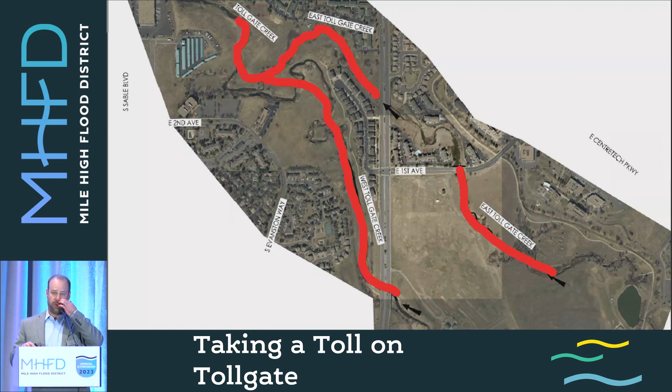So a little bit on the project background. This project actually encompassed portions of East Tollgate Creek and West Tollgate Creek, as well as the confluence downstream. This is in Aurora. 6th Avenue would be at the top of the page here, with Chambers being the north-south road in this picture. So this was actually an offshoot of a project that I'd supported while I was still with Stantec, and before I go too far, there were a lot of people who were way more involved in this project than I was in the very beginning. It was really a team effort between the City of Aurora, Stantec, Olson, CEI, and even later Icon.

But the project started out as a citywide assessment of Aurora's channels to determine which of the reaches were the most unstable and which ones wanted to be the priority for them to fix. So there was also a large floodplain split between East Tollgate Creek and West Tollgate Creek that the city wanted to mitigate, along with a few other priorities. In terms of project assumptions, we really wanted to make sure that we adhered to those guiding principles that we put down in our assumptions.

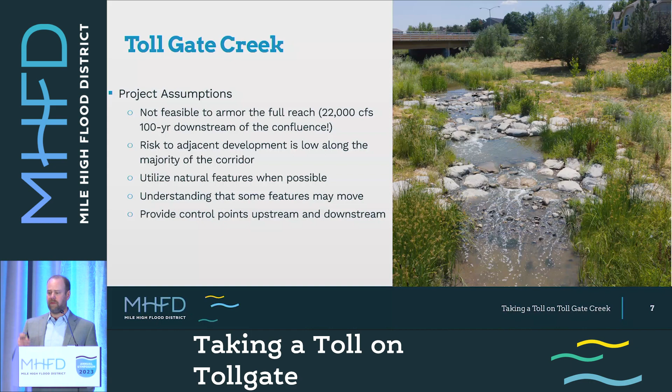So once we were finished with that assessment, we went into design and construction. And as I said, we really wanted to make sure the project goal was in mind. This is a figure that shows that floodplain split and really the impact that it has on the community here. You can see that the Peninsula townhomes were almost completely within the floodplain.

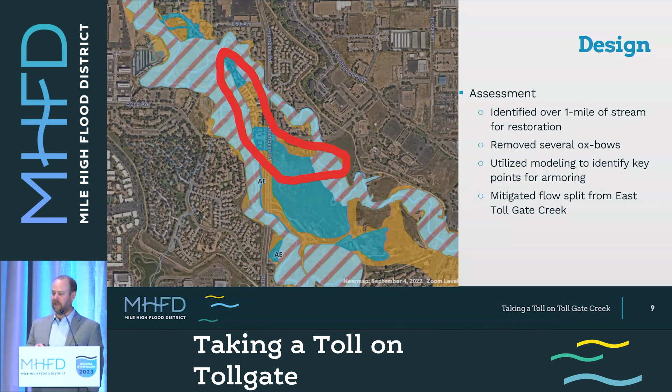And so we also wanted to stabilize the channel and provide a better overall system. We used a number of different techniques to stabilize the channel, including a few more creative techniques like stepped logs. We also used a combination of larger boulder drop structures and smaller riffles in numerous locations. We utilized an existing drop structure, which I'll discuss a little bit more later, but left some of the oxbows hydraulically connected to provide additional habitat opportunities within the watershed.

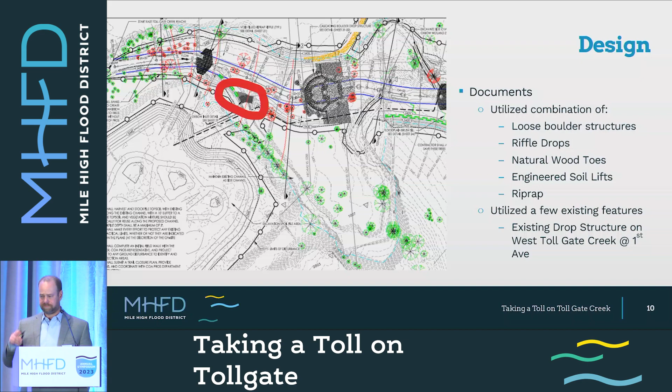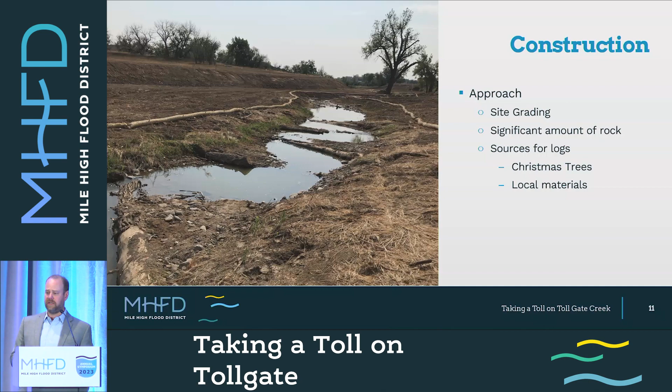Construction was still a pretty significant undertaking, even though we wanted to use a lot of the on-site materials. There was a lot of material that needed to be brought in, a lot of rock, and it was a whole team effort that really required everybody to be involved during construction. But it was so good that the contractor CEI won the 2021 Colorado Contractors Association H2O Award, which was really a well-deserved honor for the entire team.

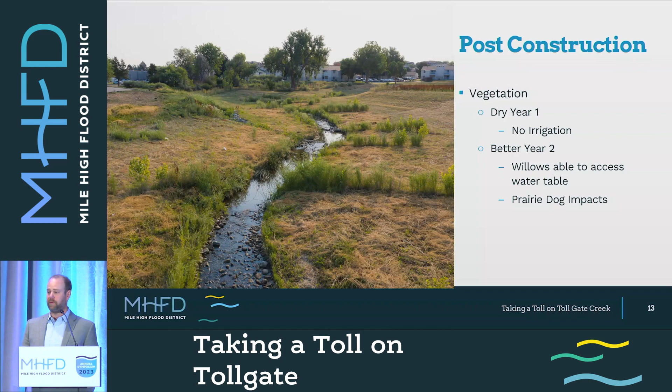But as we all know, the project doesn't stop once construction is complete. So we needed to establish vegetation, and that process can take many, many years. The first year was pretty dry, but we started to have a little bit of a better second year and did have some good establishment in certain areas. Prairie dogs are always an issue, but we did have these features like these willow stakes that were really performing pretty well. However, in some places you can start to see some exposed blanket that was going to become potentially an issue.

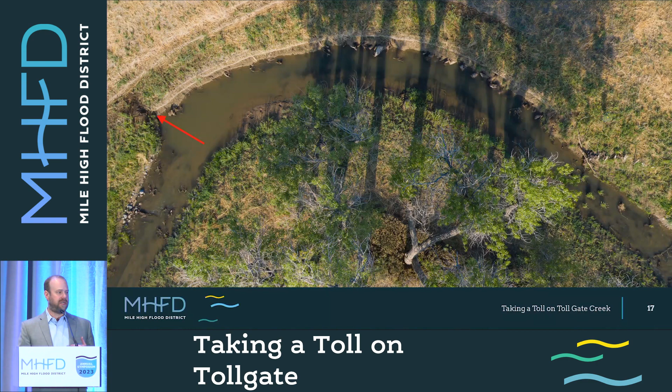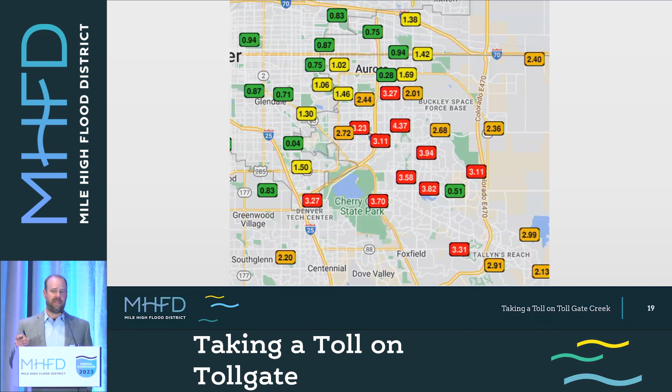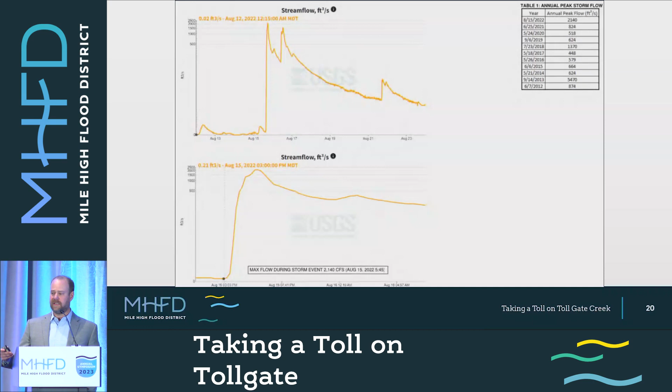And then we had August of 2022, last year, where we had a cycle of a couple of pretty high intensity storms within the watershed. We actually had over 4 inches of rainfall within the Tollgate Creek watershed. And the gauge here at 6th Avenue actually showed over 2,000 CFS coming through. There's a quote that says, sometimes there are decades when nothing happens, and then weeks when decades happen. And we got the flow from an entire decade within that week.

These pictures are actually of West Tollgate Creek within Horseshoe Park, which is in the upper part of the watershed. And this is after the peak had already passed, but you can see the amount of water that was coming through this system. So we knew that there were some areas that we were going to want to monitor, and we'd heard about some debris within the stream, and so we went out and did an initial assessment. From that assessment, we noticed that there were a few issues that we wanted to dig into further.

So we had Kate go back out there. Here she's measuring some rack lines, and we identified 6 locations that we wanted to take a closer look at. We determined 4 of the areas where we could continue to monitor because they were in low-risk areas and areas that we thought could heal more naturally. But we really wanted to dig into the other 2.

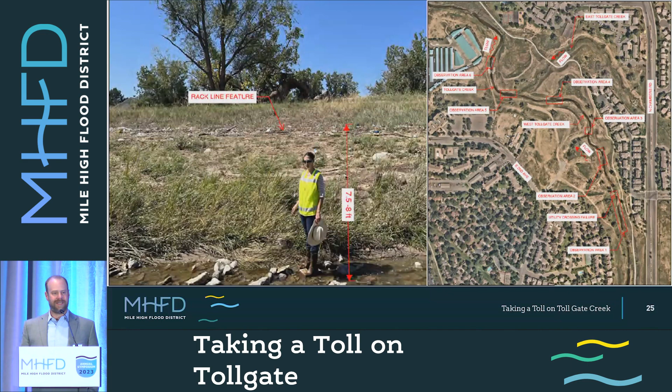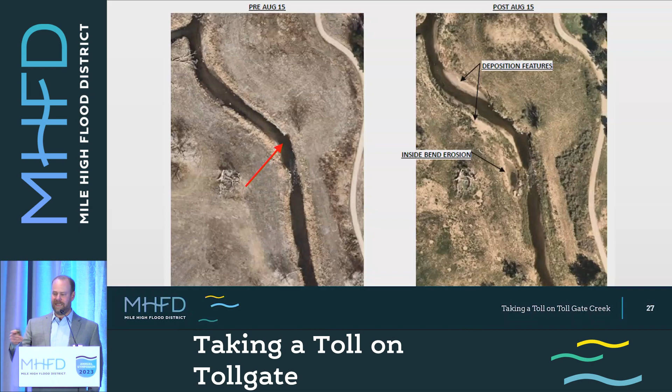The first area, which was Area 2, was just west of Chambers Road on West Tollgate Creek. I mentioned earlier that we utilized an existing drop structure as part of this project, and unfortunately that feature failed during the storm event. And this stretch happens to be just downstream of that failure. You can see in this picture on the left, before the storm, there started to be a similar notch being formed in that area. And then after the storm, the notch had expanded and some other material had been displaced. And after looking at this picture, you can see that that material really started to get displaced and started to cause problems around it.

And I think this was actually an area where we tried to protect a tree, and that tree doesn't look real good either, but I'm sure it'll provide some nice habitat at some point in time. So zooming out a little bit more, you can see that the stream really tried to stay in more of a straight line through this segment.

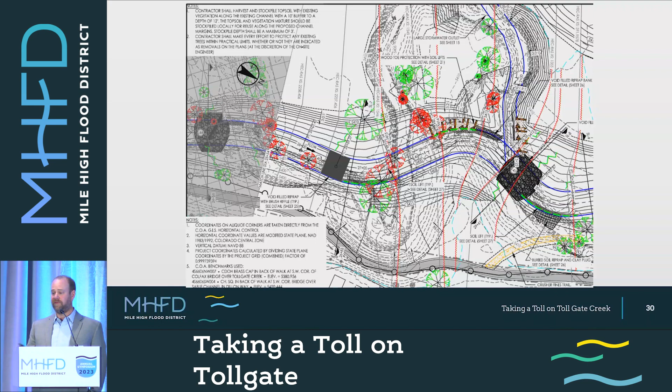You can actually see the failed drop structure here at the top of the screen, and you can see it might have actually had an impact on it. Looking back at the plans in this segment, though, we realized that we used a slightly different riffle through this segment. This feature didn't extend up into the embankment as far as the upstream and downstream features had been constructed. Because of this, it seems like the creek was able to flank the system and erode that material.

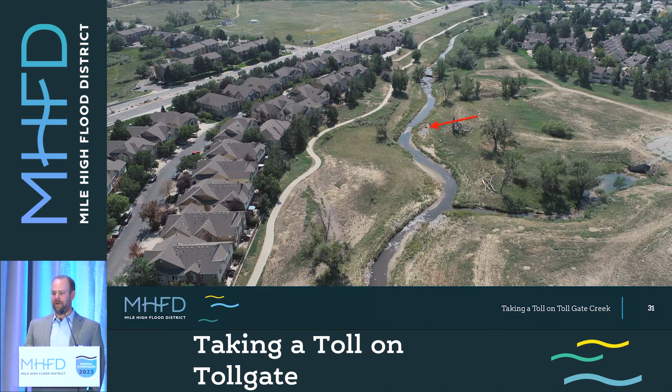Stepping back a little bit further, you can see how that failed drop structure might have actually directed a short burst of increased flow that could have helped flank the system in this location. Flying through from the drop structure, you can see how the channel really tried to just jump the bank in this location and created this erosion issue and some of the other impacts that it had.

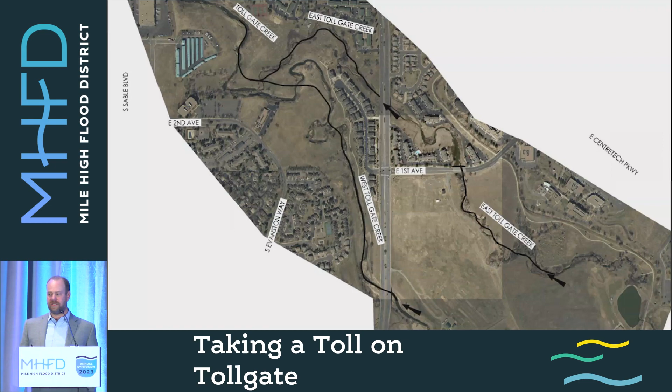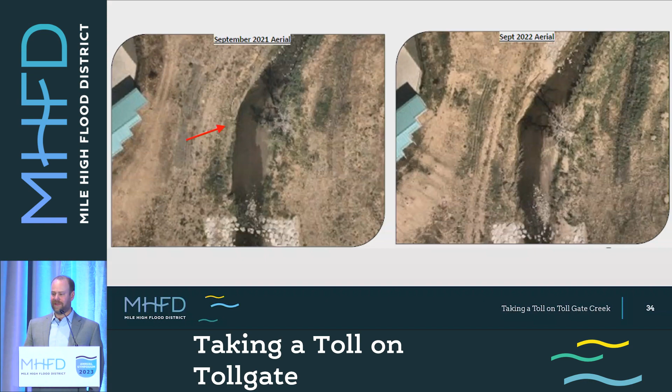Thankfully, the city just finished the emergency repair of that project, and we're looking to repair these areas over the summer. The second location that we really wanted to concentrate on was near the downstream end of the project, just below the final drop structure. We can see that even in September of '21, this area was having a hard time getting vegetation established. And then again, after the storm, it seemed like this bank was starting to erode away.

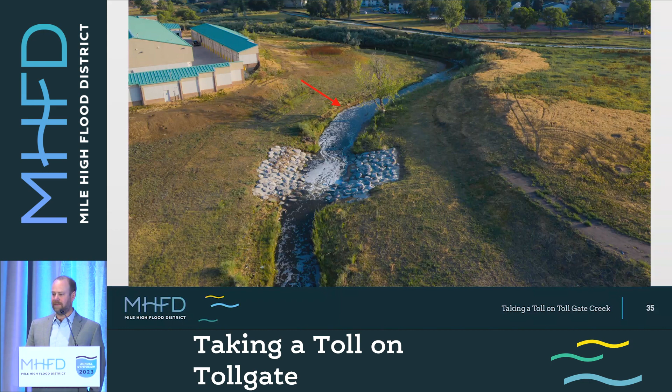This photo is actually from before the August storm, and you can see that this specific location is still having a little bit of trouble getting vegetation established. And this picture from after the storm, the post-field walk, you can see that the erosion control blanket almost looks like a trampoline in this area. There's no material underneath it. I believe just due to the vegetation, it likely just moved out and wasn't able to stay stable.

Looking at the plans in this area, you see that we actually only did soil lifts in this particular spot. Because the vegetation hadn't had a chance to establish and really hold everything together, that material was able to migrate out and it led to erosion in this area.

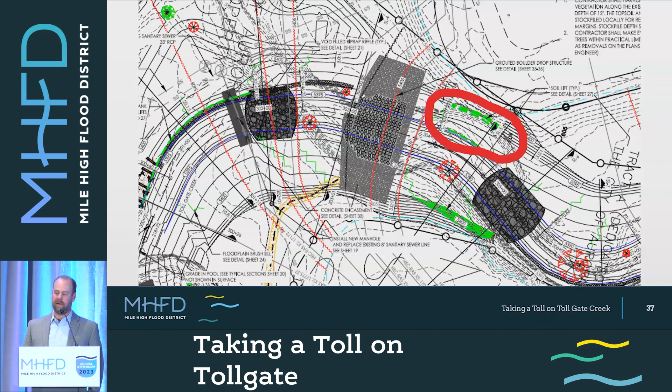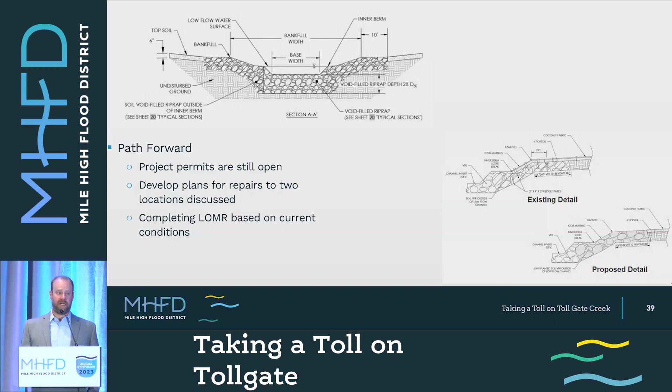So what are we going to do? As I mentioned, at the first location, we're looking at reconstructing that riffle with a version that extends further up into the bank. We're also going to work on smoothing out the transitions between the different types of soil riprap and lifts in the embankment protection. Since the project permits are actually still open, we're able to do that work under them.

At the second location, we're going to have to strengthen the protection downstream of the drop a little bit more. The challenge we're still going to have is vegetation establishment. As far as the original project goes, we're still moving forward with the LOMR in this location to make sure that we meet the project goal of removing the floodplain from the Peninsula townhomes. We're planning to work under a no-rise scenario, but we'll have to look into that as we get closer. We'll continue to monitor the other locations to determine what interventions are required or if they will heal on their own.

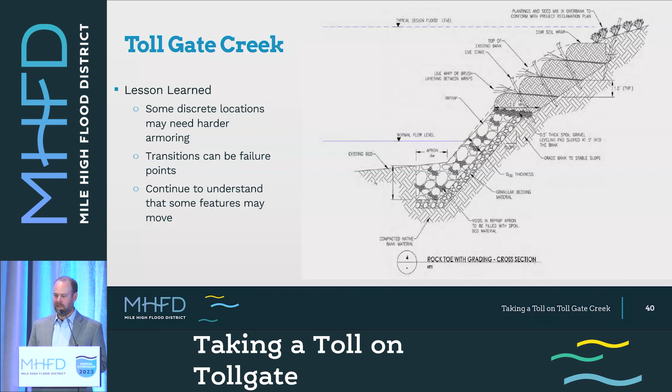One of the things that jumps out to me from these initial assessments is the transition point between those embankment types. We need to make sure we're taking an extra look at that in design to make sure they're put in the right place, but also in construction to make sure those features get translated correctly.

There's really a lot of things that I loved about this project and hydrology and hydraulics in general, and one of them is that they're not perfect. There's no single answer to every one of these questions. As a profession, we need to continue to push ourselves to try new things, but also learn from the projects that we've completed. The Tollgate Creek project was a successful project for many reasons, but mostly that we can learn from it. We'll continue to try these new techniques and design concepts, but we need all of you to help implement them. And I'm looking forward to the next opportunity that we get to learn from a project.